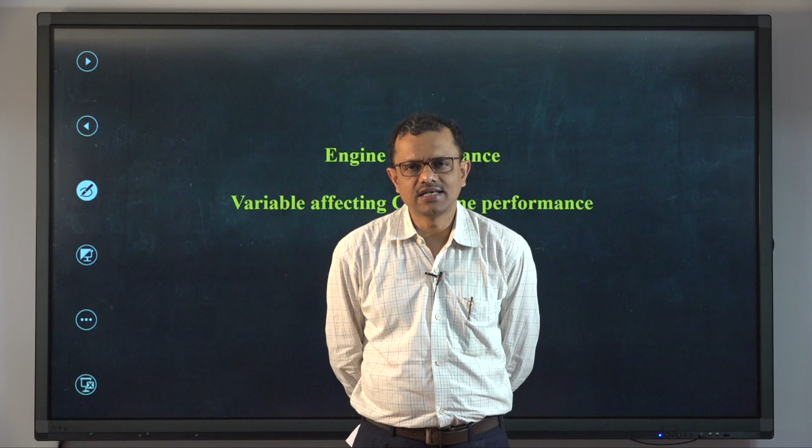If you can recall, in our previous module we discussed about SI and CI engine performance, and we identified a few factors that affect the performance of SI engine. Today we shall see that many of these factors also affect the performance of CI engine in the same manner.

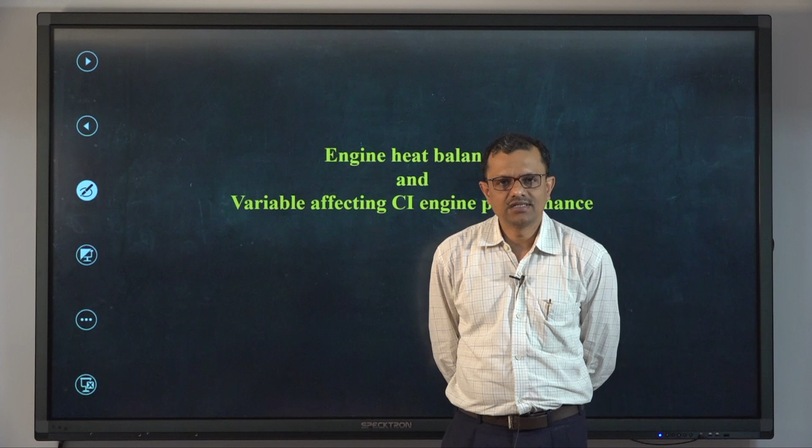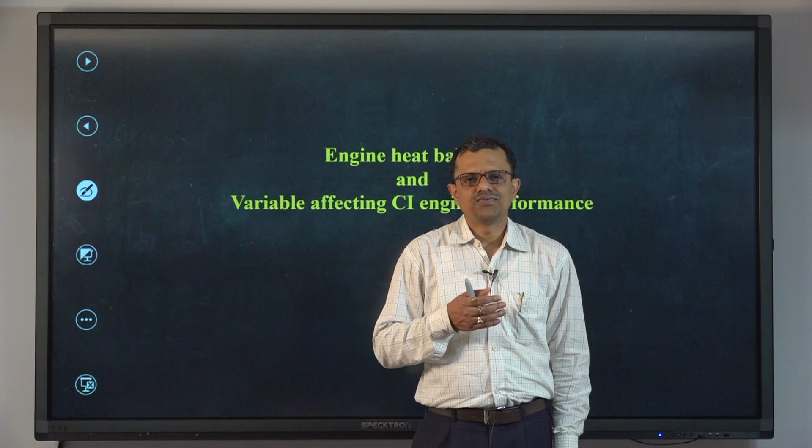Let us first identify the common factors, and then we will see two important factors that should be considered by the designer when designing a CI engine for better performance of the engine as well as smooth operation.

So if we try to write a few common factors that affect the performance of SI engine, let us write them: number one is speed, then air consumption, and number three is compression ratio.

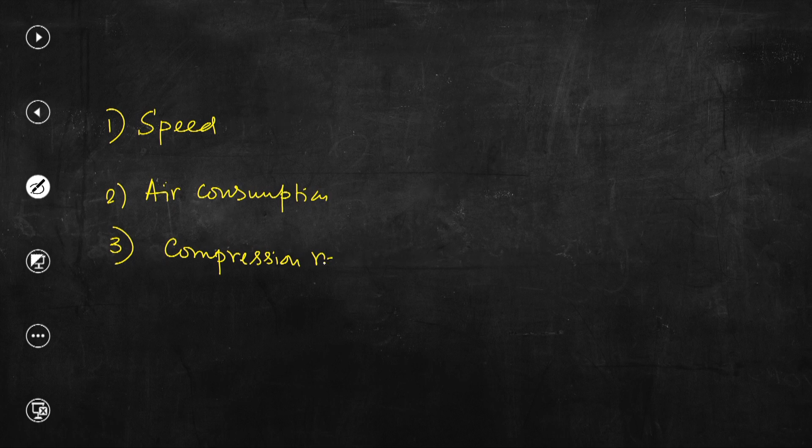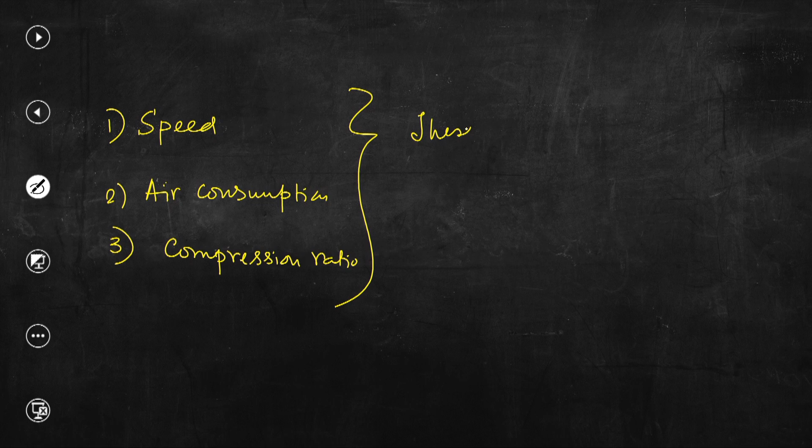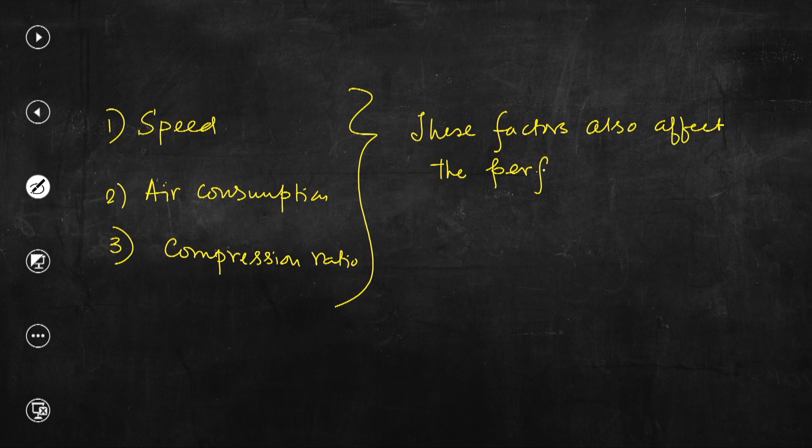So these three factors, if you can recall, we have discussed in detail how they affect the performance of SI engine. Now these factors also affect the performance of CI engines, and we will see in which capacity these factors trigger engine performance.

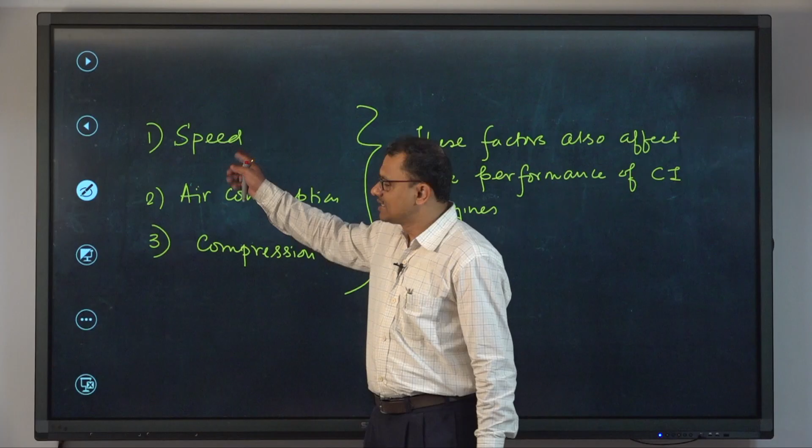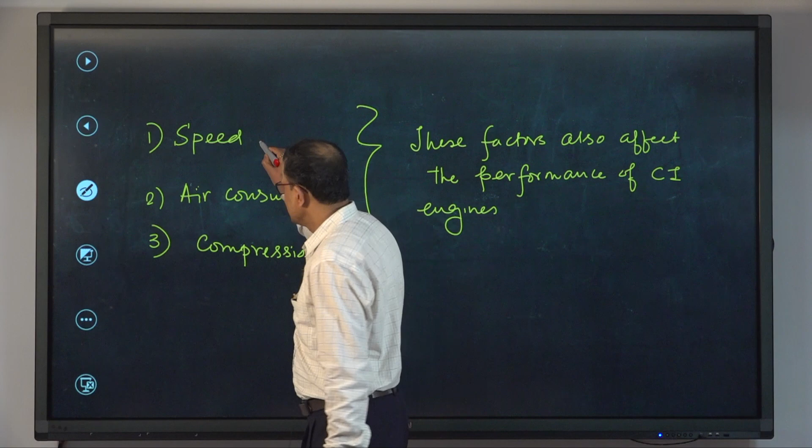We know that if we increase the speed, certainly the power output of the engine will increase, as we discussed in the context of SI engine. Here also, increasing the speed of CI engine will ensure higher power output. So this factor is also very important to be considered for the design of CI engine.

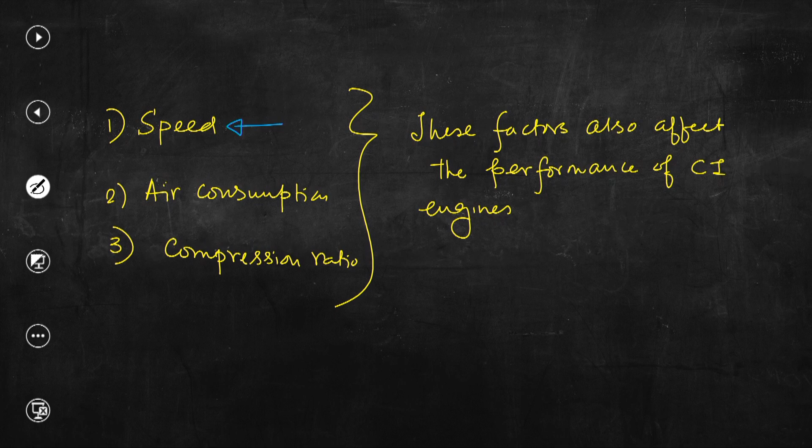Then what about air consumption? We all have understood by this time that if a greater mass of air is consumed by the engine, certainly a greater amount of fuel can be burned and engine power output will increase.

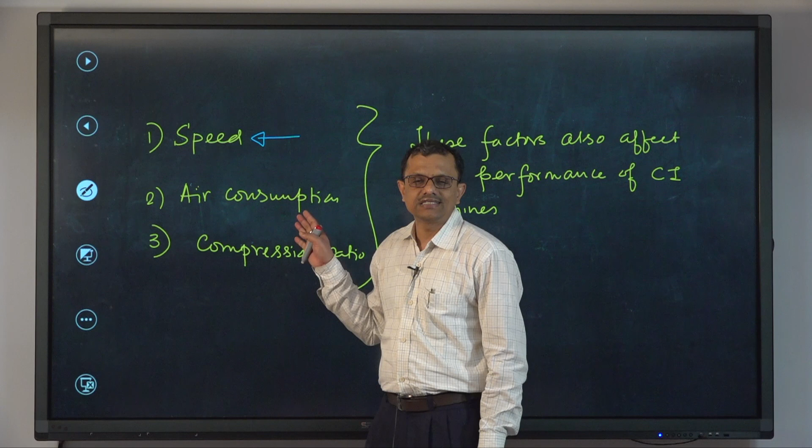But the question is, and this is true for both SI and CI engines, that in the context of CI engine, proper use or utilization of air is very important. Designers should design in such a way that the air drawn into the engine cylinder is effectively used for the operation of the engine. Essentially, effective use of the consumed air should be ensured.

Then the last one is the compression ratio. We all have studied in our undergraduate IC engine course that the higher the compression ratio, certainly the peak pressure or the pressure rise at the end of the compression stroke will be more. And as you have studied, a higher rise in pressure is accompanied with a rise in temperature, and when that high temperature air or charge is combusted upon spraying fuel, the temperature rise will be even more.

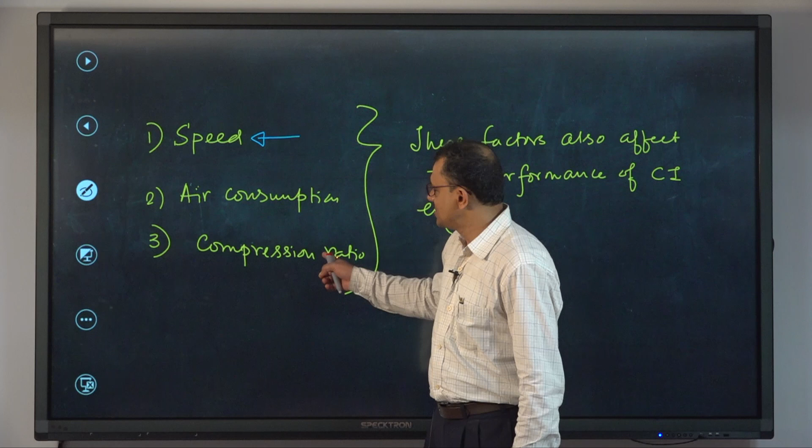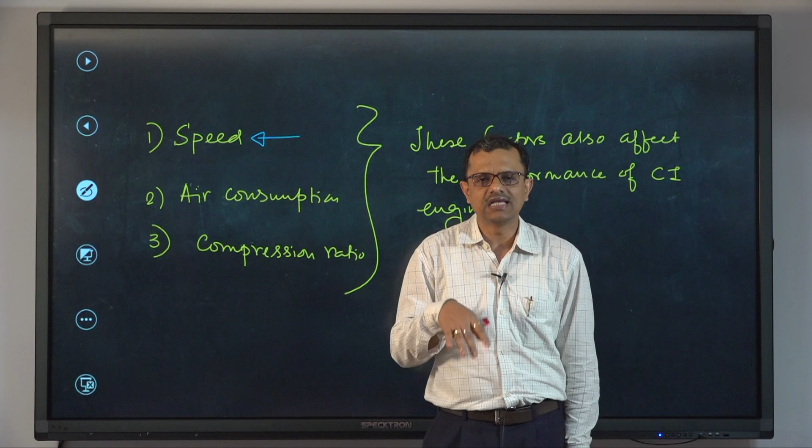So if the compression ratio is high, the power output of the engine will be high. If you recall the thermal efficiency expressions for both SI and CI engines, thermal efficiency is a function of RC, that is compression ratio. But the compression ratio cannot be increased beyond a certain limit for the SI engine, because it will lead to another detrimental phenomenon, that is knock.

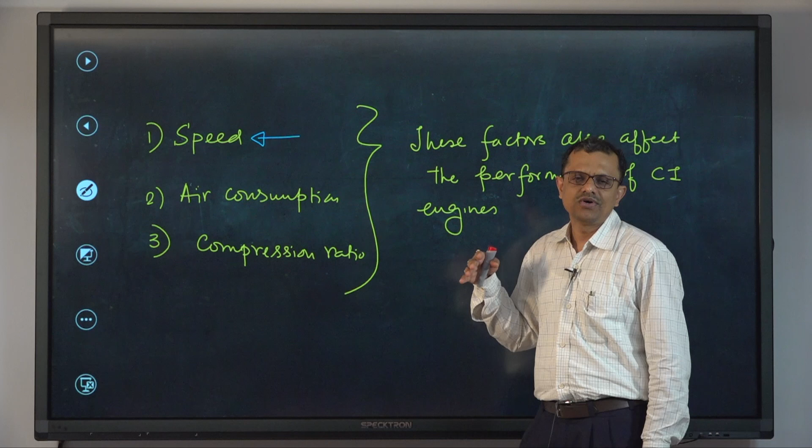But for the CI engine, though knock is not there, constructional issues will be there, because the engine will be bulky since the cylinder walls should be thicker to withstand that high pressure, and some constructional problems will arise. So all these factors affect the performance of CI engine, and the designer will select all these factors judiciously for better operation of the engine as well as maximum performance.

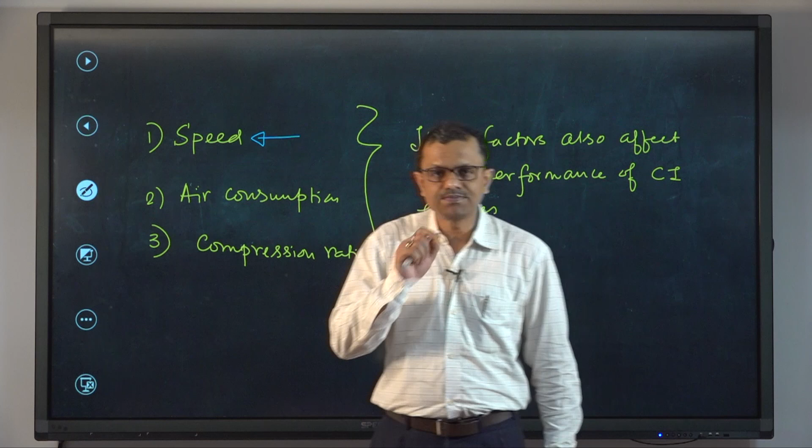So, in addition to these three factors, let me write here two other important aspects that are really important for the operation of CI engines. Let me write: two important factors that affect the performance of CI engines.

Okay, so number one, let me write here, this is known as injection timing.

Injection timing means, in particular for CI engines, air is compressed during the compression stroke, and towards the end of the compression stroke, fuel is sprayed into the combustion chamber or engine cylinder. So the injection time over which fuel is sprayed into the cylinder is very important, essentially for the peak pressure to be developed, and also total power output. This injection time refers to the time duration over which the required amount of fuel must be injected or sprayed into the engine cylinder.

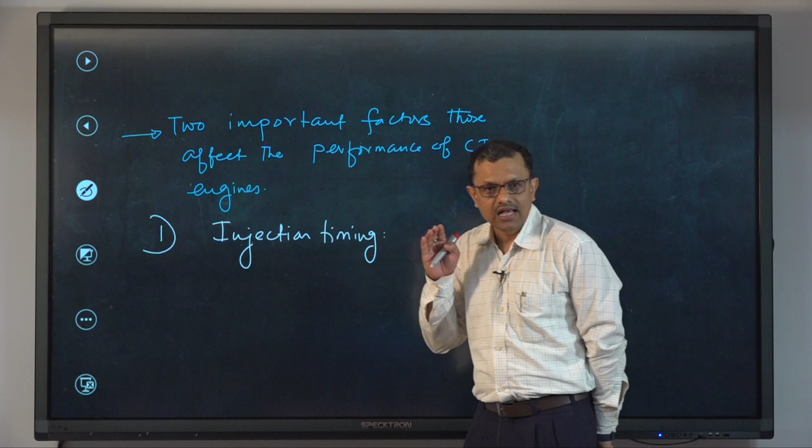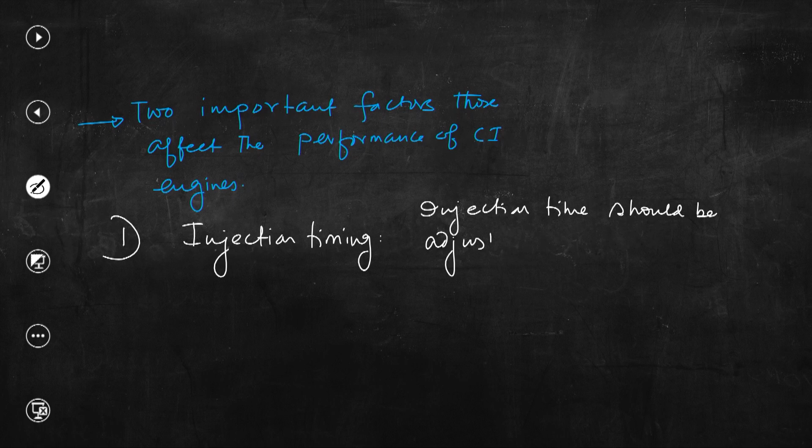Now, this injection time has to be adjusted so that rise in peak pressure should not be compromised, and engine operation should not be jerky or rough. So injection time should be adjusted such that the engine produces maximum power, without causing rough engine operation and without producing undesirable smoke in the exhaust.

Let me tell you once again about the development of peak pressure. You know this is called the valve timing diagram, which you have probably studied in your undergraduate internal combustion engine course. So in the valve timing diagram, if I write here, this is BDC, this is TDC, and this is again BDC.

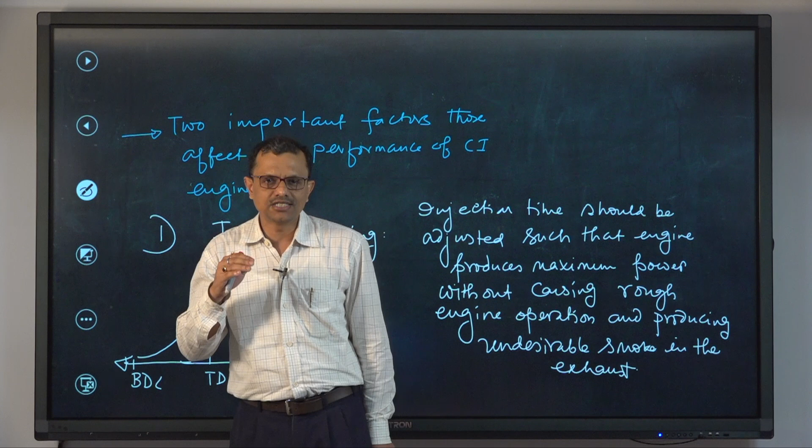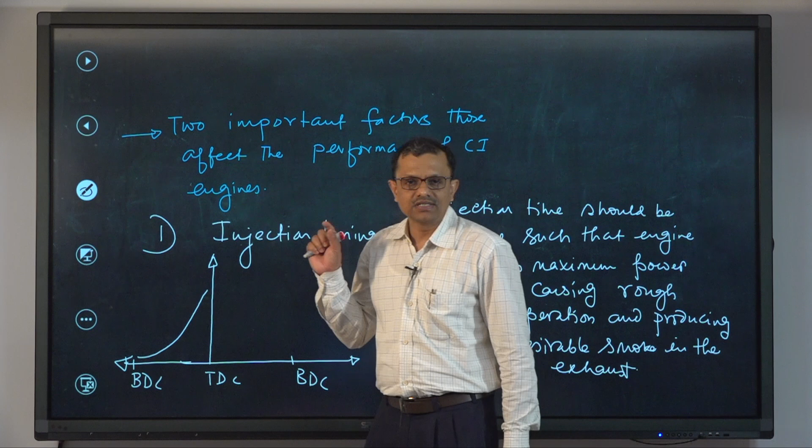As the piston travels from BDC toward TDC during the compression stroke, the sucked-in volume of air will be compressed, and towards the end of the compression stroke air pressure will increase. Before TDC, for CI engines, fuel injection is started, because recall that in a CI engine the combustion process is mimicked by constant pressure heat addition, not constant volume heat addition. So in constant pressure heat addition, it is assumed that the first part of combustion, fuel injection, will start before the piston reaches TDC, and will continue as the piston travels back from TDC towards BDC during the power stroke.

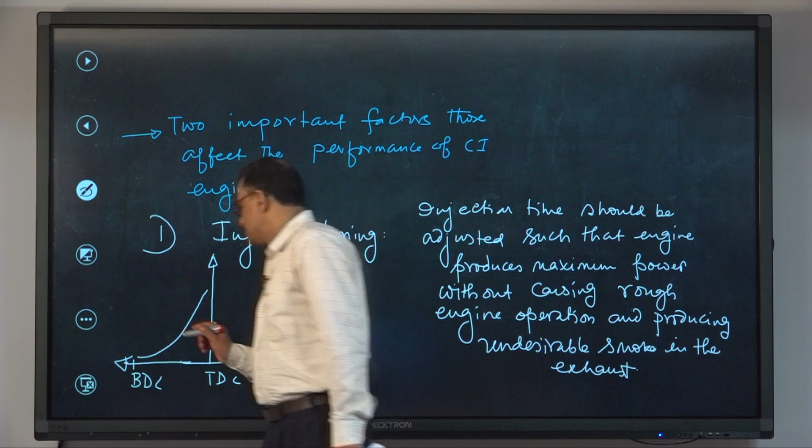So this is the compression stroke, and this is the power stroke or expansion stroke. Now, if the piston is travelling toward TDC and we have the peak pressure here, then if the case is that when the piston is coming back from TDC towards BDC, the second phase of combustion is completed, the piston is coming down from TDC to BDC and the rise in pressure because of this combustion will try to create some jerky motion of the piston, as shown here.

So essentially, the fuel injection period or injection time, the time duration over which fuel should be injected, is very crucial for smooth operation of the CI engine as well as better performance. Why better performance? If substantial combustion takes place when the piston is coming back from TDC towards BDC, then since the piston has already travelled back from TDC to BDC, the power produced because of that combustion will not be utilized. Hence we need to compromise with the efficiency or power output of the engine, and the operation will be jerky.

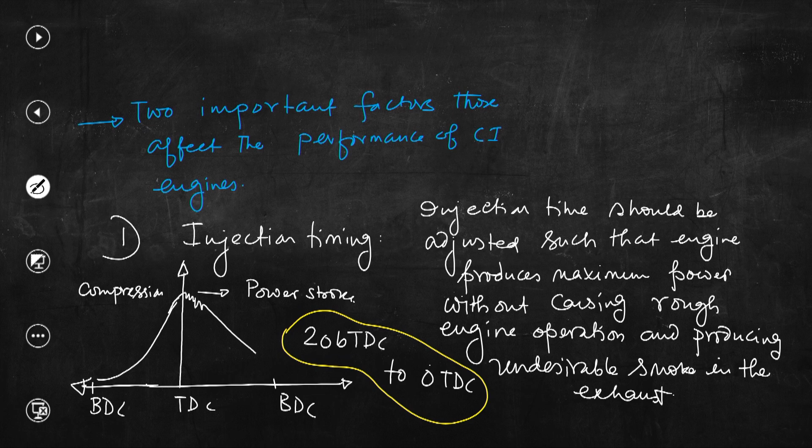Now, from this discussion, one key point: pressure rise due to combustion has to negotiate with the expanding volume of the cylinder. So the take home message from this particular discussion is that the pressure rise due to combustion has to negotiate with the expanding volume of the cylinder.

As the piston is traveling back from TDC to BDC, the piston cylinder volume is becoming more, so expanding. This is the take home message you should remember.

The next point I would like to discuss in this context is the port and valve timings, and that is point number 2. This is again important.

Why is this important? We have studied that the inlet valve is very important, that the closing and opening time of the inlet valve is crucial, so as to ensure that adequate amount of air or charge can be drawn into the cylinder. On the contrary, proper opening of the exhaust valve is necessary, so as to expel the combustion gases from the cylinder into the ambience with very small pressure difference.

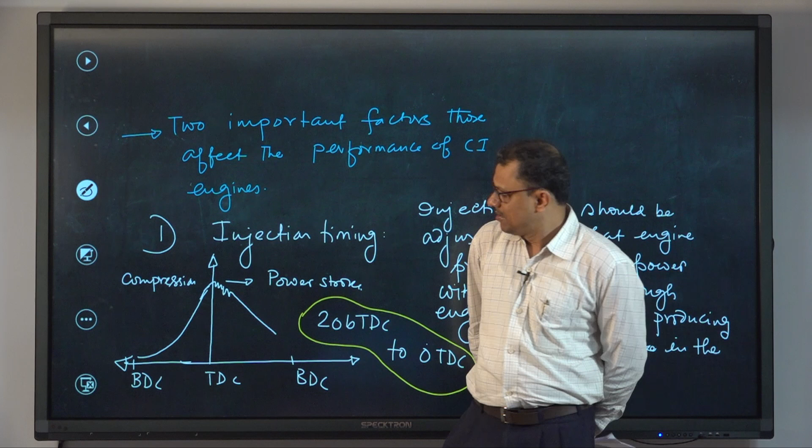This is the power stroke, and we are getting work output from this stroke only. Now, the piston will reach BDC, but before it reaches BDC, if we try to open the exhaust valve, then the pressure in the cylinder is relatively very high, and that pressure will allow exhaust gases to leave from the cylinder into the ambience.

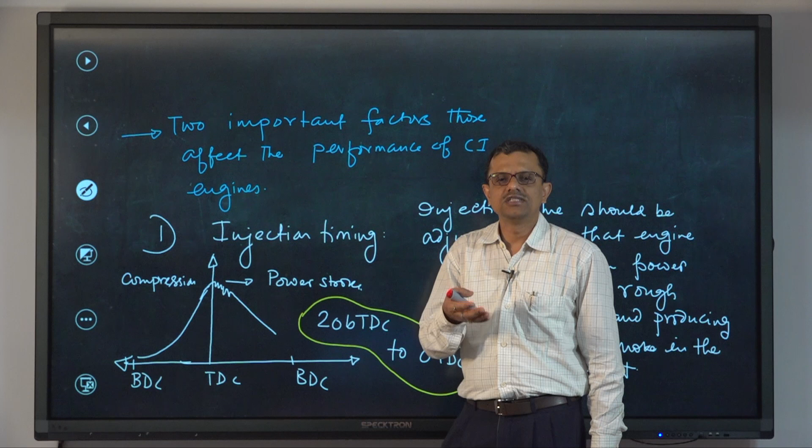But if that is the case, then at the moment we try to open the exhaust valve, the pressure inside the cylinder will fall, and instead of getting some work or output, that work, enthalpy, or energy will be lost with the exhaust gases.

So proper opening and closing of both the inlet and exhaust valves are very important, essentially for the smooth operation of the CI engine. So if I write here just one line, it will be clear to you all.

The timing of the valves — here timings refer to the opening and closing of the valves. So I am writing: opening and closing of the valves.

Timings of the valves for both 4-stroke cycle SI and CI engines are guided by the same logic. What is the logic?

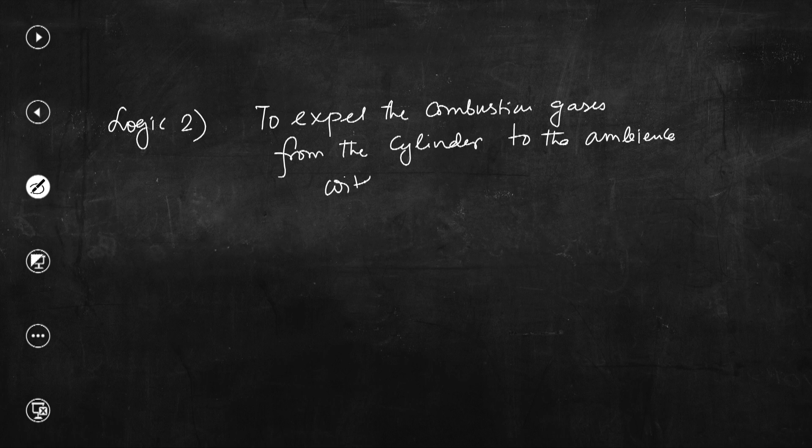With the smallest possible pressure difference. Certainly you know that pressure difference is the driving force to make any flow occur, right? So until and unless there is a pressure difference, no flow can take place.

So when combustion gases or exhaust gases are allowed to leave from the cylinder to the ambience, there must be a pressure difference. If the pressure difference is really more, certainly the combustion gases can be readily moved or expelled from the engine cylinder, but as I discussed a few minutes back...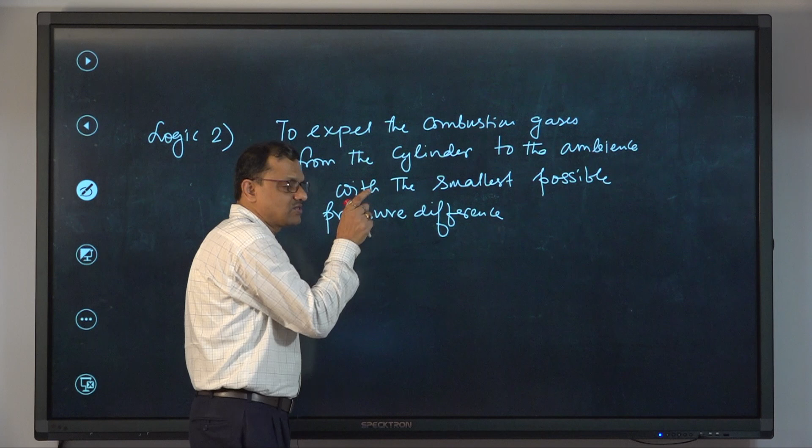Combustion gases are typically expelled to the ambience at atmospheric pressure. So if the pressure difference is more, the pressure inside the cylinder will be more. If we open the exhaust valve a little before the piston reaches BDC, that higher pressure difference will allow quicker removal of exhaust gases, but we will not be able to utilize that pressure which would otherwise produce work output. So it is ensured that the exhaust valve design and timing are such that combustion gases can be expelled from the cylinder to the ambience with the smallest pressure difference between cylinder and atmosphere.

So this is the important point. Now, in this context, before I go to discuss engine heat balance, let me tell you that in the context of both two stroke cycle CI and SI engines, typically one process is there that is known as scavenging.

What is this process? Incoming air — ports are allowed to open so that incoming air will automatically allow the exhaust gases to leave out from the engine cylinder. Rather, the incoming air stream, or if it is a CI engine only air stream, or if it is an SI engine then air-fuel mixture, that is charge, is allowed to expel the combustion gases from the cylinder.

Now, when the combustion gases are leaving from the cylinder, if it is an SI engine, then a certain amount of fresh charge will also go away with the combustion gases. This is essentially a loss because that charge could otherwise be used to produce some energy.

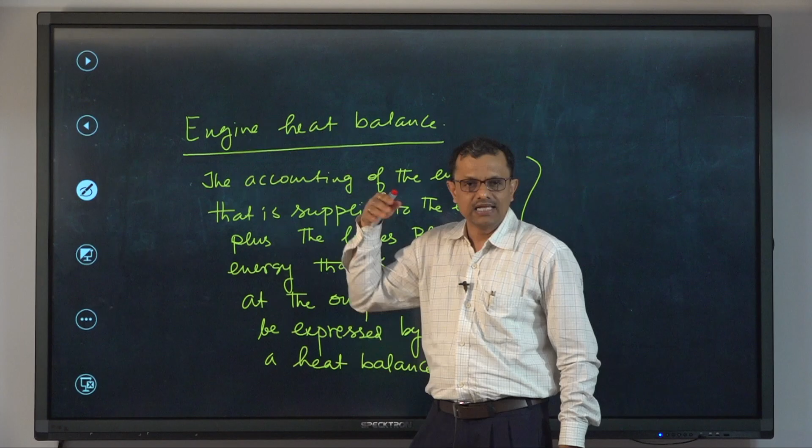So essentially, as I said, engine heat balance. Heat is the energy we have studied in our basic thermodynamics course. Energy which is produced because of burning the fuel is heat, and energy which is available at the output shaft is the work. So all these are energies. Now, as I said, inside the fuel, chemical energy is stored. The fuel is burnt in the presence of oxygen, and then we get energy which is heat. Heat is generated because of the combustion.

Now that is the energy available inside the engine cylinder. Now, from here we are getting work, that is also energy available at the shaft.

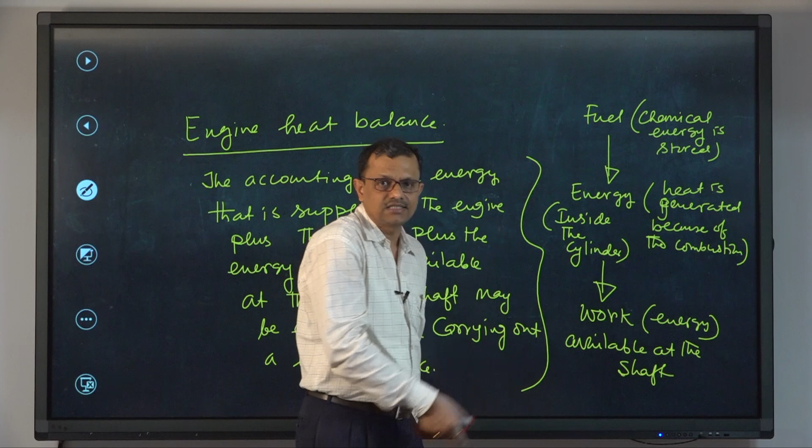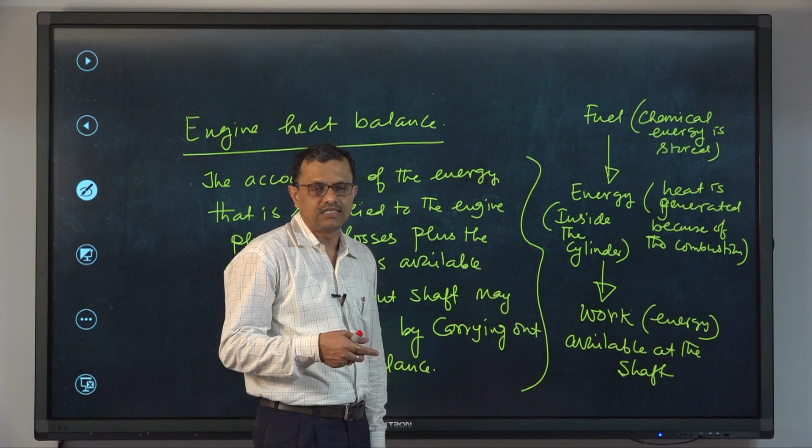Energy is conserved. The amount of energy stored in the fuel is converted to another form, heat, and a certain amount of that heat is utilized to get work at the output shaft, while some energy is lost. But total energy remains constant. This means the energy supplied to the engine is not equal to the energy available at the shaft, and that is why we had to define efficiencies: overall efficiency, thermal efficiency, mechanical efficiency, and volumetric efficiency of the engine. If we take an effort to account for the energy supplied to the engine plus the losses plus the energy available at the shaft, the entire process can be expressed by carrying out a heat balance, known as the engine heat balance.

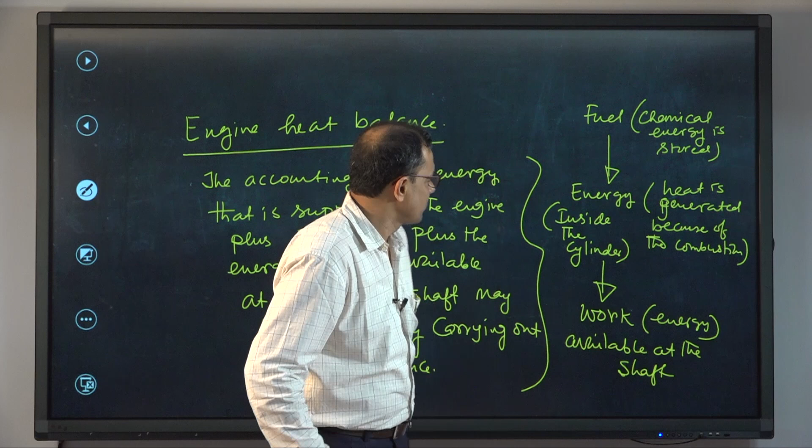The designer will design the engine so that maximum energy can be obtained at the output shaft. Our objective is to supply a certain amount of energy to get energy in a different form at the shaft. The designer of the engine should be very careful to design each and every component so that, with good design, the output available at the shaft can be maximized.

If the designer needs to know exactly what the power output or output energy would be at the cost of the input energy, the designer needs to identify the locations where certain amounts of energy are utilized to overcome several auxiliary loads, certain amounts of energy are lost through coolant, and certain amounts of energy are utilized to overcome frictional effects.

In an engine, output power or output energy is obtained at the cost of some input energy. Whenever a designer tries to design an engine, they must be careful in designing several components to ensure the output energy can be maximized. The designer must identify places or sources where a certain amount of energy will be lost, or used to overcome other parasitic loads, so that the output power or output energy can be maximized at the cost of the input energy.

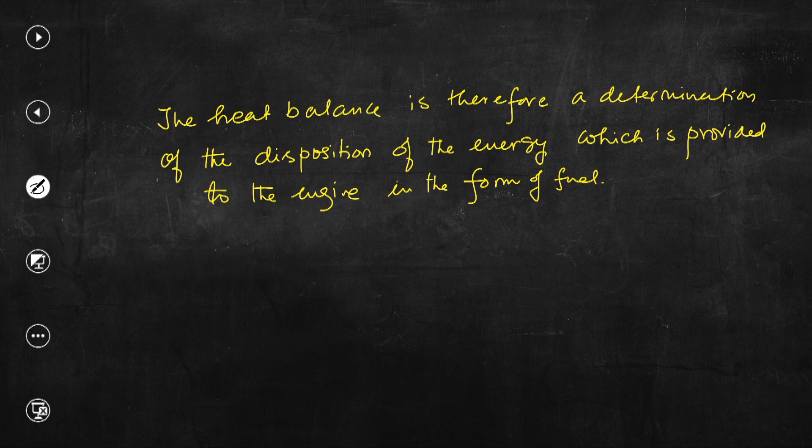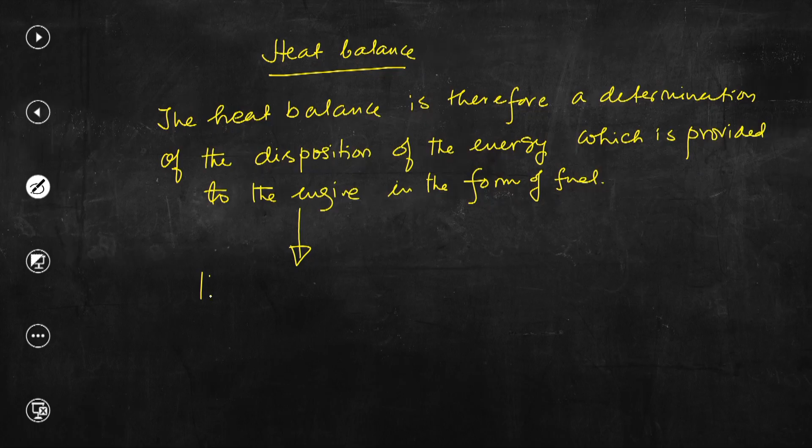This particular analysis, or accounting of this energy budget, helps to determine the areas which must be focused on for obtaining better performance.

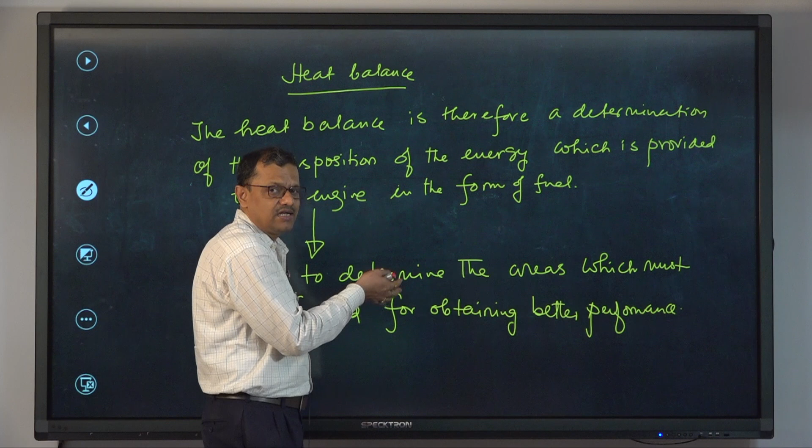We know the amount of energy supplied to the engine at the cost of that input energy. If we can identify the areas where a portion of energy is used to overcome parasitic loads, or lost, it will help the designer focus on those areas to ensure the performance of the engine can be maximized, meaning the output power available at the output shaft can be maximized. So, this is the heat balance.

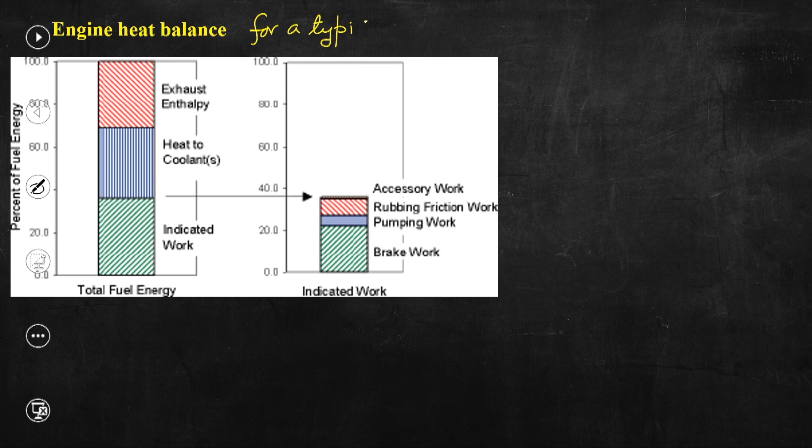If we look at a typical heat balance of an SI engine, it looks like this. This is the typical heat balance for a typical SI engine. What we can see from this diagram, on the y axis, is the percentage of the fuel energy, which is 100%. Energy cannot be created or destroyed.

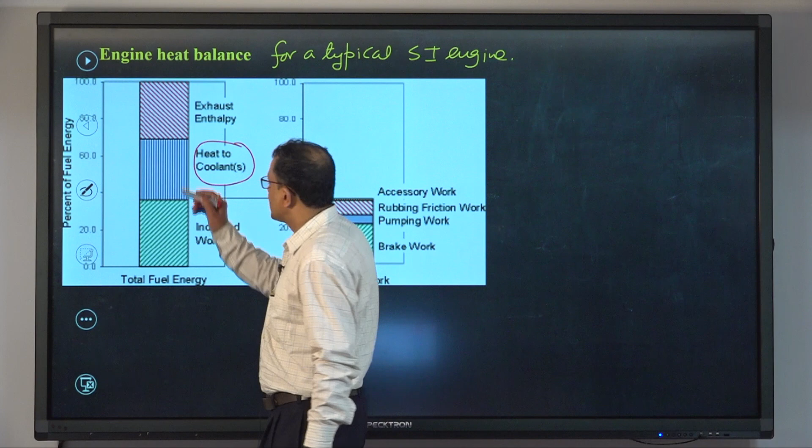So the energy available with the fuel, say 100%, out of this, if we look at this diagram, we can see only roughly 40% is the indicated work. Certain amounts of heat are supplied to the coolant, and certain amounts of energy are carried away by the exhaust gases, meaning the exhaust gases carry enthalpy. So energy is getting lost, and a certain amount of energy is transferred to the coolant.

We have studied that it is ironic that we need to supply fuel to get work output, knowing fully that we need to supply a certain amount of energy to obtain a certain amount of work, yet we are trying to take away energy from the engine itself by supplying coolant. That is where the second law of thermodynamics is very important, meaning any device cannot be operated with 100% efficiency.

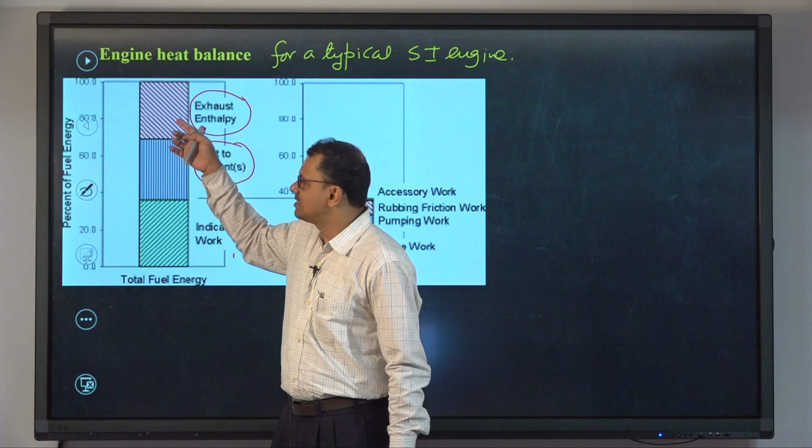We know very well that we are going to supply a certain amount of energy. Out of this 100% energy, only 1/3 is the indicated work, that is work available inside the cylinder. The remaining 60% or even more is used to overcome several parasitic loads, and almost 30% of that is lost with the exhaust gases.

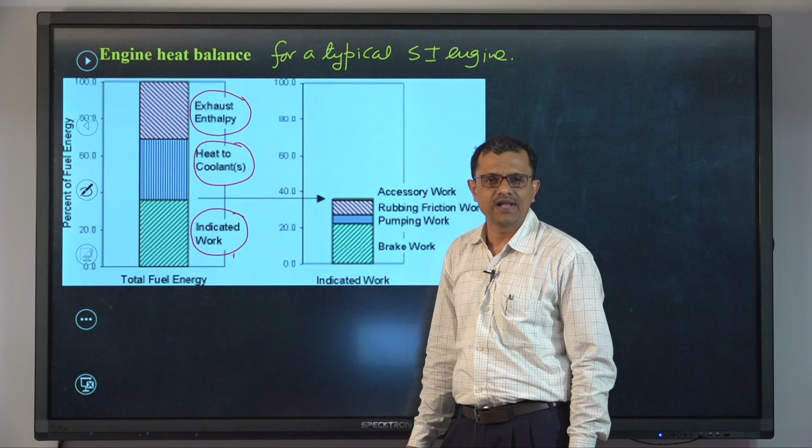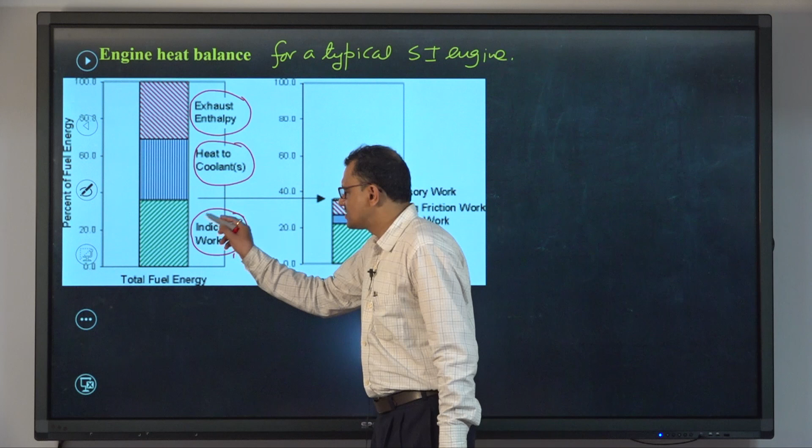So if we look at this indicated work, that is only 1/3 of the total energy supplied to the engine, this indicated work has several components. If we look at the block diagram in the right panel, out of this total fuel energy, the indicated work has many components. The most important component is the brake work, which is the work available at the shaft.

Then we have pumping work. What is pumping work? This has two components. The engine has one small pump used to supply water to the radiator or to the cooling water jacket. Over and above that small pump, which is driven by taking energy from the output, we know that out of 4 different strokes, only one stroke is the power stroke, and the remaining 3 strokes are idle strokes. To execute these 3 strokes, we need to borrow energy from the output power. This is known as pumping.

So basically we need to pump the exhaust gases. The exhaust gases should be expelled from the engine cylinder to the ambience through the exhaust valve, and that is the exhaust stroke. The exhaust stroke pushes all the gases from the cylinder to leave to the atmosphere, and at the same time, when the piston is coming back from TDC to BDC during the intake stroke, we are trying to pump a certain amount of fresh air or charge into the engine cylinder. So the energy needed to execute these two strokes is known as pumping energy.

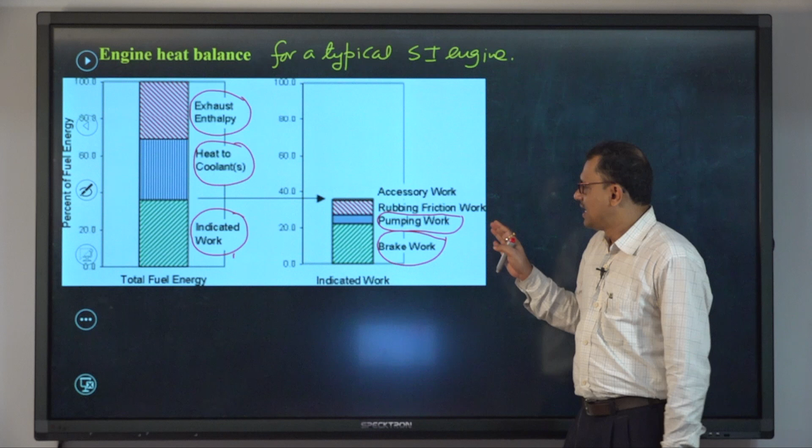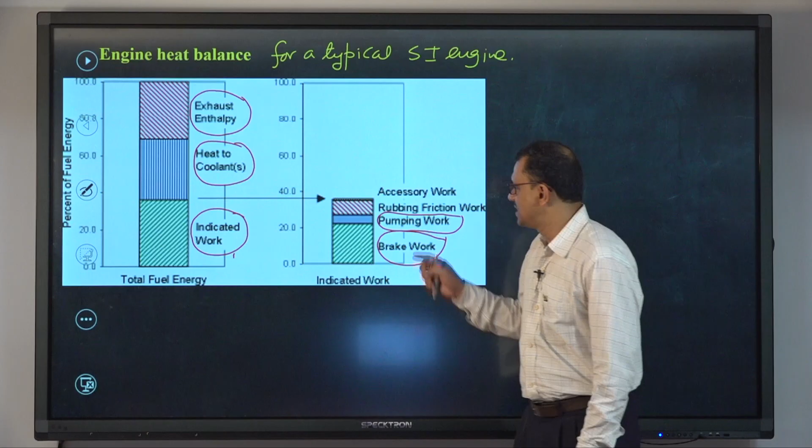Then we have rubbing or frictional work, meaning the piston will move or reciprocate between these two locations continuously. When two mechanical components are in contact with each other, we really cannot ignore or make the frictional losses zero. Certainly efforts have been taken to minimize frictional losses, but still the rubbing effect of frictional loss will be there.

This is the rubbing or frictional effect, and there is also one small component known as accessory work, or the energy needed to run several auxiliary systems for parasitic loads. For example, in a passenger vehicle, if we have an air conditioning unit, we need some amount of energy to run it, and that energy is borrowed from the output work. Similarly, during daytime there is no need for lighting, but when we require it, the energy used to turn on the light will again come from the output energy.

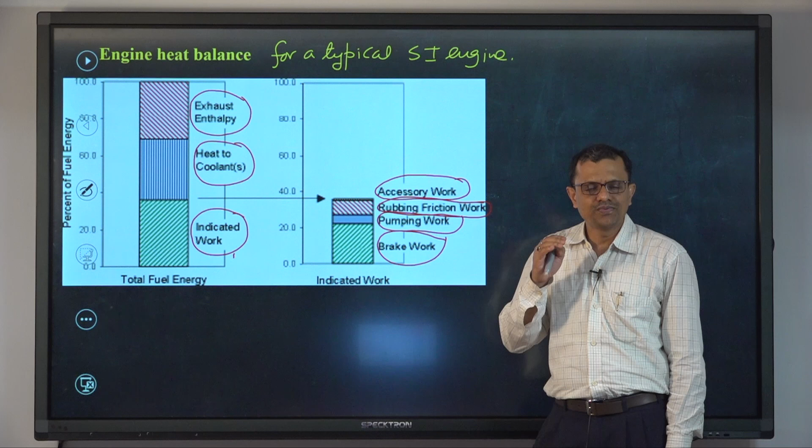So all these are parasitic loads, and these consume a small fraction of the indicated work. This means the designer needs to know exactly the areas where a certain amount of energy will be lost or used, and that information helps the designer focus on those areas to improve them, so as to maximize the brake work, which will essentially improve or maximize the engine performance.

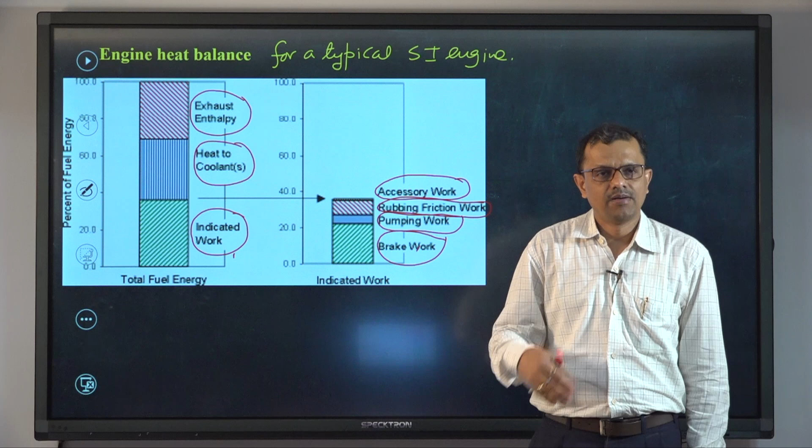So if I write a few lines in this context: qualitatively, energy balance can be better understood from this diagram. If we look at this diagram, we can get some information qualitatively about this energy balance.

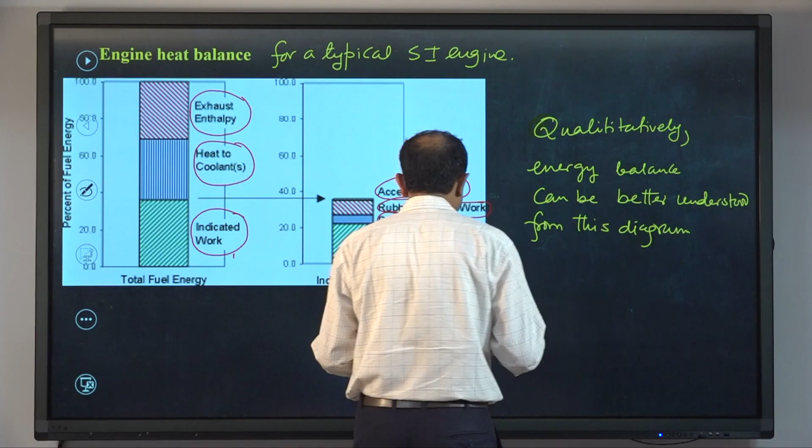But if we need to quantify, then let us write exactly what portion of the output work is needed to run the pumping work, what portion of the output work is needed to overcome the frictional losses, and what portion of the output work is required to run the parasitic systems. So if we go for quantification, let me write a few lines.

So if I write here: examination of the quantitative aspects. If we go back to the previous line, and if we come here: examination of the quantitative aspects of the typical energy balance diagram as shown in the previous slide.

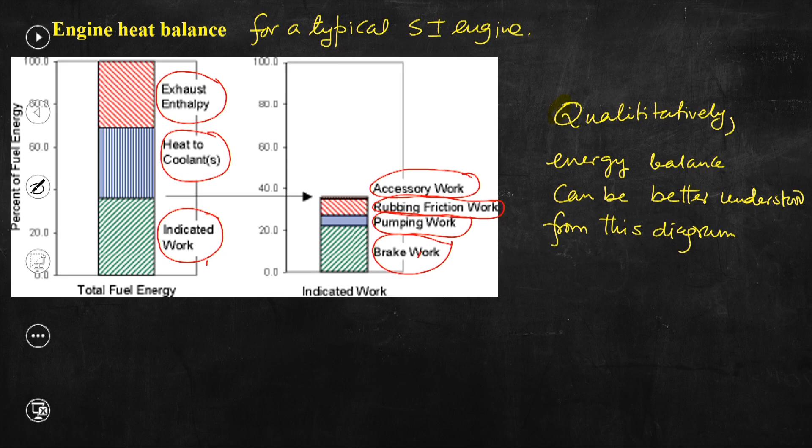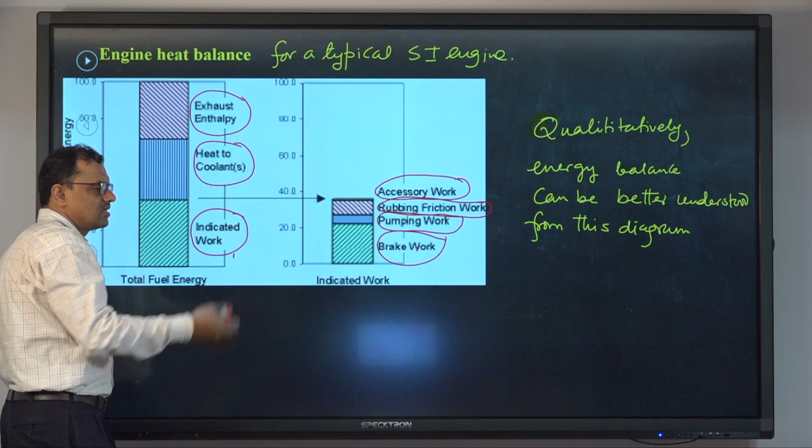Let me tell you one thing, if we go to the previous slide, we can see out of this total 100%, that is energy supplied to the engine in the form of fuel, one third is getting lost through the exhaust gases because they carry enthalpy. One third of that energy, heat, is transferred to the coolant. So again this is lost energy, and the remaining one third is the indicated work.

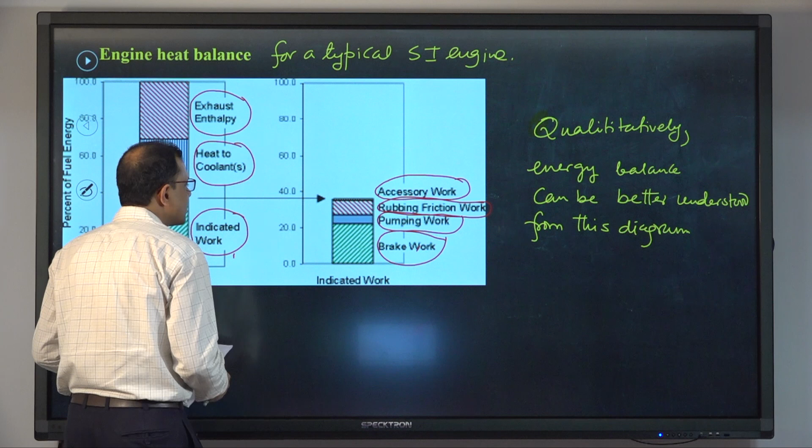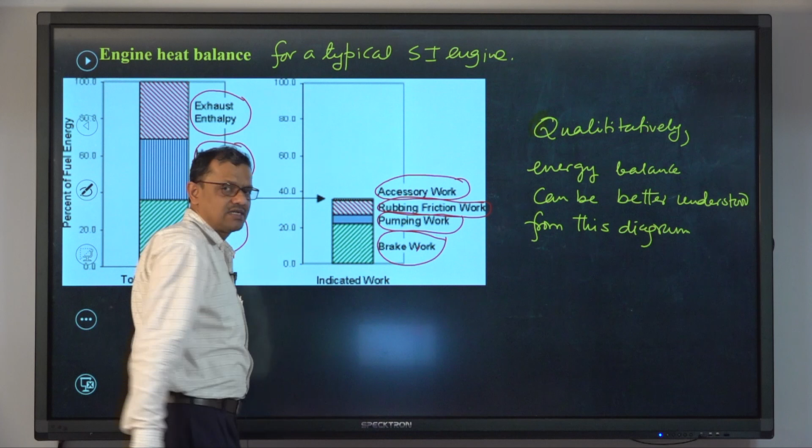Out of this indicated work, the brake work is even 40% lower than the indicated work. So whatever amount of work or power produced inside the cylinder, 40% less of that work is available at the shaft, that is brake work. So that 40% which is not available at the shaft is utilized to overcome all these accessory or parasitic loads, pumping work, to execute the other idle strokes, and also to overcome the frictional losses.

So this is one thing, and if we go to the next slide, the last point I will write is that pumping losses comprise approximately 5% of the total fuel energy.

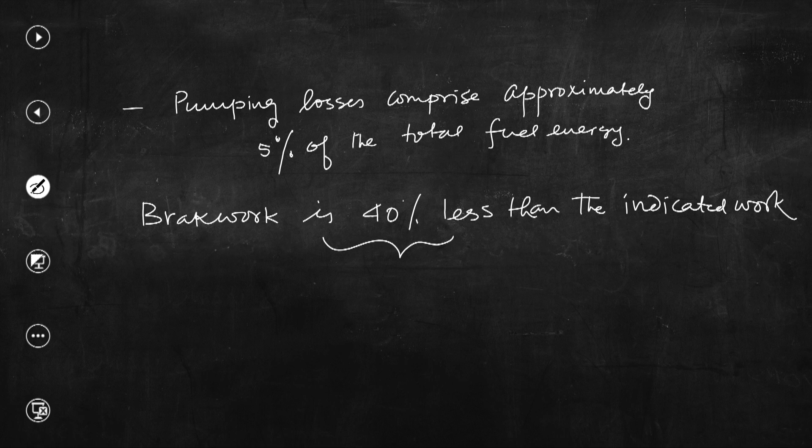As I said, only 40% brake power is nearly 40% less than the indicated work. So this 40% work which is not available at the shaft is used to overcome losses. So, brake work is 40% less than the indicated work, and this 40% includes pumping losses, frictional losses, and parasitic loads.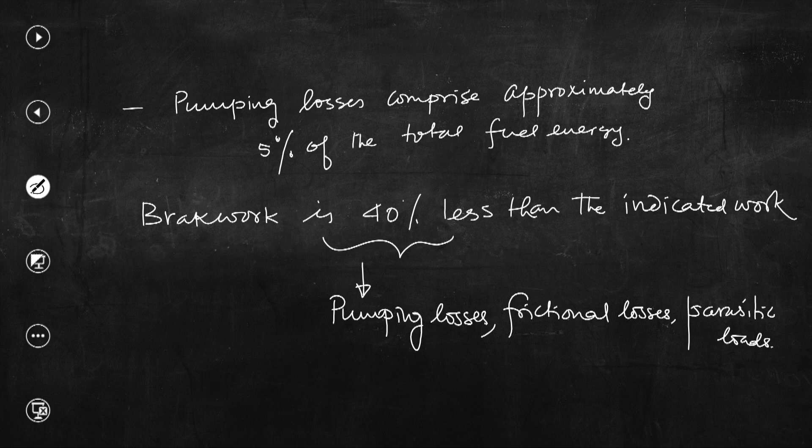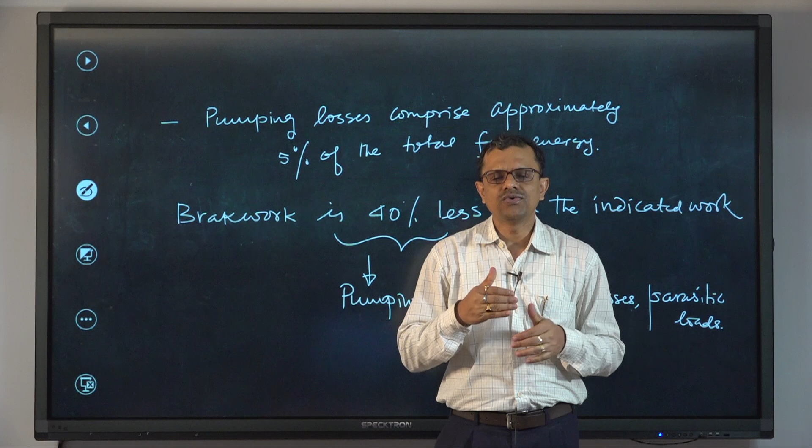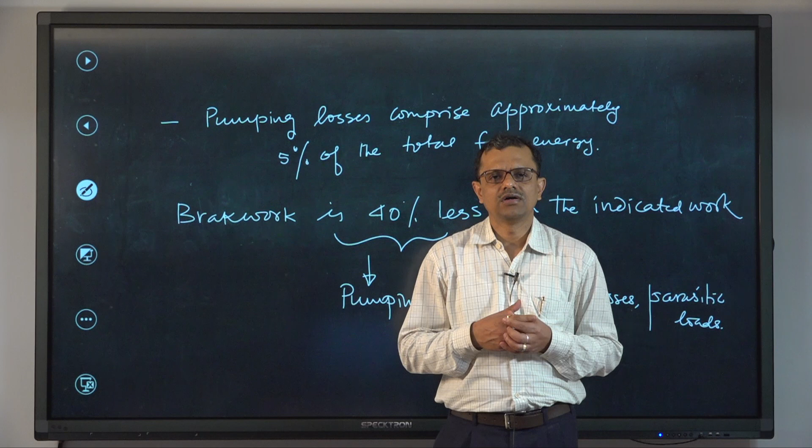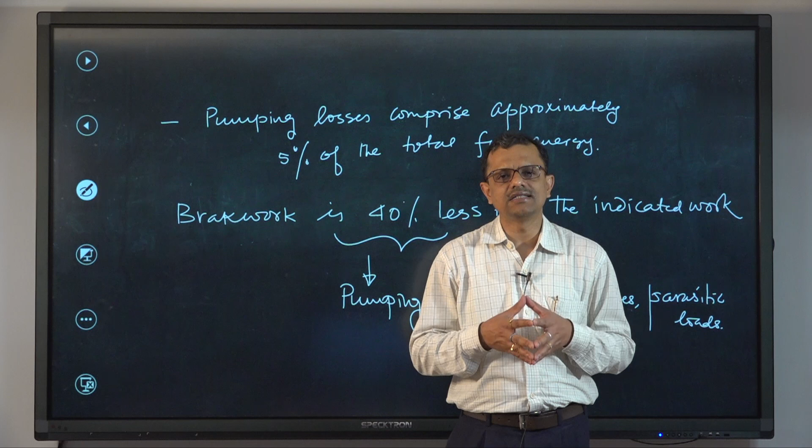So this is the quantitative estimate of the typical heat balance that we had discussed today. To summarize today's discussion: we started by identifying factors that affect CI engine performance, recapitulating all the factors that affect both CI and SI engines. Then we identified two important factors that exclusively affect CI engine performance. Thereafter we discussed engine heat balance, why we need it, and what it means in the context of engine operation, and then discussed a typical heat balance for the SI engine. We saw from the heat balance itself it is possible to have a qualitative estimate of several areas where energy is lost, and then we covered the quantitative aspects of that heat balance diagram, seeing exactly out of the total energy supplied to the engine in the form of fuel, how much energy is available at the shaft as useful work. So with this I stop here today, and we shall continue our discussion in the next class. Thank you.